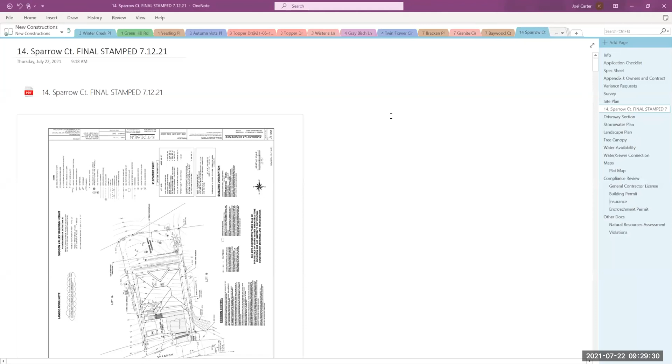I think if you want to submit things with problems, you want to submit a lot earlier in the season. Well, not to make excuses—it seems like that's what I'm doing—but a lot of this was me not expecting this year to be like this, because I'm used to something else from years in the past.

Another thing was I tried submitting a lot of my properties early in the year, and I wasn't able to because of all the change in the office—they made a mistake that wasn't right with my insurance, and they wouldn't let me submit to the ACC for about 2 months until they realized everything was fine. So I would have liked to have all this submitted and taken care of way earlier, and I'm scrambling, and that 2 months really screwed me up, and it was an office mistake.

And then we waited—there were changes in employment, and Joel got on board, so all that kind of snowballed. I agree with you guys, this should have been done right 3 months ago. With everything that's going on, I'm scrambling, making the best out of it.

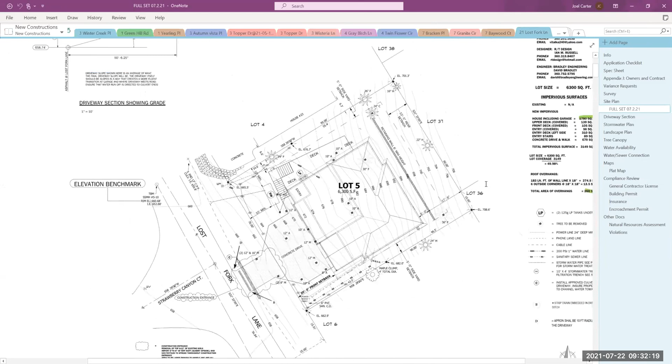If I can get conditional approval, I will make all the necessary changes before I even start building anything. I just want to clear the lot. Didn't we give you two conditional approvals last week? Yep.

Personally, I'm working on both of those properties to fix everything you guys talked about. Hopefully real soon I will submit new plans showing all the changes, everything we talked about on those two. Essentially, I've got no choice but to ask for the same thing here. They're drawn up the way they were a while back. I got all the feedback just recently in the last week or two, and I'm making all the changes. Some of them are quick, some not so much.

The open space isn't that easy to change for the whole house. Like I said, my solution is to cut the eaves on the side and the back. There are homes in Sun Valley like that. I don't love the look of it, but it fixes that problem. And if I can't get the variance, then that's my plan B, which fixes and takes care of that problem.

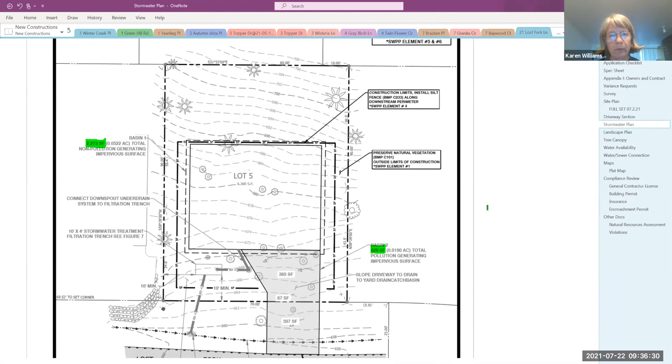It needs to be approved also by ACC, not just by the county, because it bears their engineer's stamp. Well yeah, that's their job, their work. So ACC is the one that stamped it, submitted to county, and then county approved. Yes, and I would like to see that stamp. I can submit all of that to you guys to show that stormwater, everything works just the way it should be, and it's all approved by both the stormwater engineer who designed the system, Ian Russell, and also Belinda at Whatcom County Planning.

I think ACC would like to see that, especially if it's different from this original one, if you haven't updated it. Yeah, easy. Okay, I'm trying to find it now - as soon as I do, I'll email that over to you, Joel.

Let's see, what are other... My problem is that we've got a house with multiple variances again. I mean, I can usually go with one variance if there's an extenuating circumstance, but I don't see the extenuating circumstance here. It's just too large of a house for the lot. And I know we're trying to make it fit, but a variance to me is something that comes when there's an extenuating circumstance, like a wetland or something that needs to be avoided, or the county forcing you to change the plan. So I'm uncomfortable with this one.

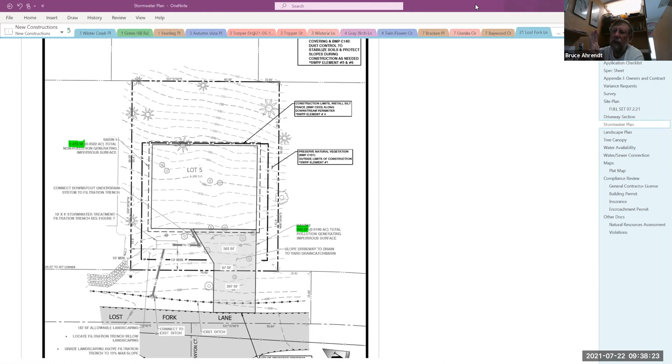You're comfortable with what, Bruce? I'm uncomfortable with this one. We've got multiple variances and stuff. Usually, to me, a variance is something that is done because of an extenuating circumstance, like the county making you move something away from something. This is just because the house is too large for the lot. And going in with an eaveless house, I don't think is a good idea either. I think we'd be much better all the way around if it just got punted and made to fit the lot.

Joel, we have another house from this contractor to review today as well. No, not from Vitali. This is the last one with issues. We had 2 last week.

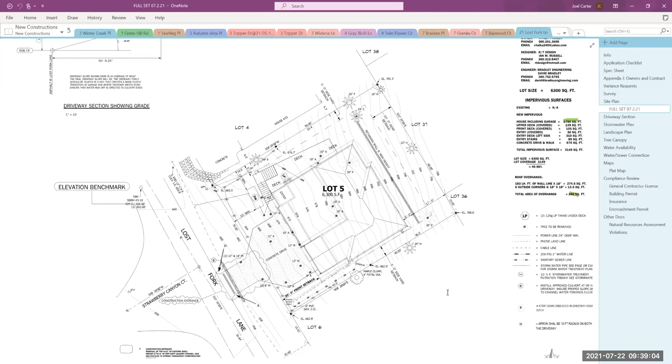And this lot is scary steep. In the back half, I looked at the survey contours and it's 80% slope. On my site visit, I ended up actually getting back there to the back, where along the lot line between the house that's there already, 23 in here. I think that big tree on the lot line is why that area is stable. When that tree dies or has to be cut down, I wonder what'll happen. To me, you need a lot more care on the retaining walls, to not disturb root zones of important trees.

The 24-inch cedar, maybe we can't remove that without harming the 26-inch fir. I just think that this lot is super vulnerable to problems from disturbing it. And so I really don't like doing anything in a rush, not seeing all the problems addressed, and approving it. I'm sorry if this means you can't build it this year. I really, really feel uncomfortable with this whole lot. I have to agree with Bruce and Karen.

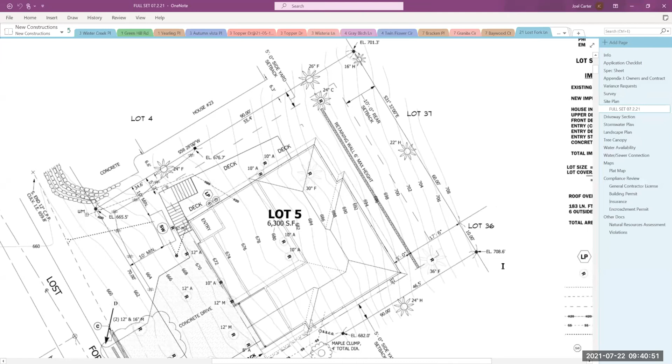All right, anyone want to make a motion? As far as the retaining walls, the trees, the stormwater, the topography, the houses around, I mean, I've gone through over a year of several engineers and county and reports and soils tests, stormwater, geo. Everybody's looked at this and said, here are your permits, you can build. And we're going to have several inspectors out there to make sure that it gets built in a way that doesn't affect anything, there's no danger, and everything is good.

So all of those things, maybe you guys are uncomfortable with, but we've got professionals with a stamp, with reports that all agree that yes, you can build. And although it's a very difficult lot, it's not unusual in our area, especially with the lots being built right now. As far as the variances, yes, my house is a few percentage too big. Again, I can fix that. I just can't fix it in a week.

So I can take care of the variance, or I can lose the eaves, which would allow me to build the house. Having a house with no eaves, although not aesthetically the best, is a thing that is in Sun Valley. There are houses like this in Sun Valley with no eaves, and I'm just saying the sides and the back, which the back nobody's going to see, the sides barely, and that's just my solution.

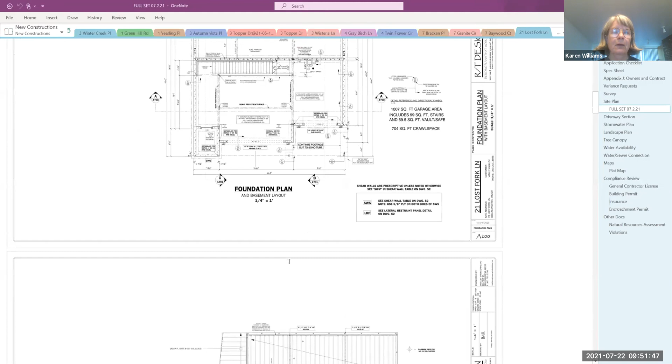And I don't want to lose the eaves. I think the eaves need to stay on there. That's not a big deal compared to your other issues, but...

The house was raised based on a previous ACC comment about reducing the slopes, and as a consequence, now the driveway is too steep. Exactly, I mean we can't just pre-approve something where you fix one thing and it creates another issue. I don't think we can blindly pre-approve things - you fix one thing and then don't see the consequences of it.

So again, I don't think this thing is going to make it this year if it has to be a pre-approval type situation in order to do it. It's not a pre-approval - is there any reason why I can't get approval with conditions, and we know what those are, and it's an easy fix?

I just can't do it in a week because I'm not able to show you guys. But these aren't conditions that are... these are not unknown unknowns where we don't know what we're doing, and if we're changing this, the whole house is going to be impacted.

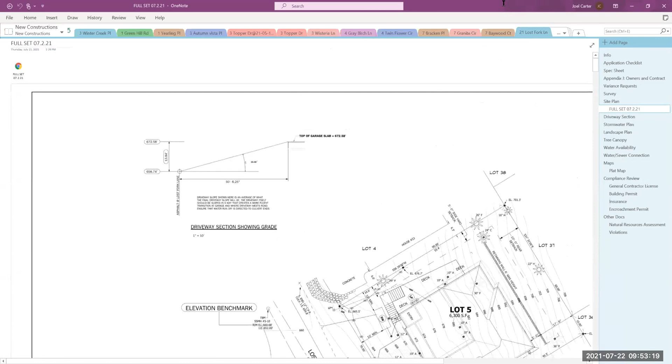No, this is two things, and we overlooked the driveway because we're rushing this, but we can play with the elevation of the house to where it meets both the slope area and the driveway. The retaining wall has already been addressed. He's just looking at this more carefully and putting a lot of this stuff on the plan, which we haven't had to do in previous years. So he's taking care of all of that, and all of it will be taken care of.

And I'm not asking - Vitaly, let me ask you then, so if you're asking for conditional approval so you can go out and get your earthwork started, is what I'm understanding you correctly? And then what happens - trees cut, we allow that, and then your engineers come back and say we can't meet all the requirements. Then what happens? I'm not going to allow that to happen.

We're going to meet all of your guys' requirements because looking at this, we're very, very, very close. I'm not trying to put a 17,000 square foot house on a 2,000 square foot lot.

We're off by just a tiny little bit here, a little bit there. There's a reason why we got inspections and a larger deposit, and there's consequences in building these homes on these slopes. Just like when you're remodeling a house, you run into issues and you address them and fix them.

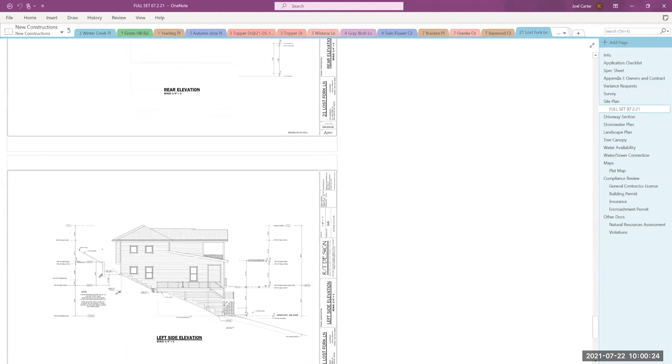And my architect was saying I can do it, I just need a little bit of time, because there's another Sudden Valley builder calling him up every single day with the same exact issue. It just so happens this architect's got a few builders and he's doing the same thing for them. I would love to be able to go do this myself or hire another architect, but I don't have that as an option. I could do it, I just can't do it in a couple of days.

I'd be inclined to go along with the conditional, but does anyone want to make a motion?

Yeah, just one more comment. We gave conditionals on two of his properties last week. I would be most comfortable deferring this to make sure that the conditions on those other two properties are met as he builds them.

Yeah, I'm not at all comfortable passing this until I see all the issues addressed. I think that attempting to address the slopes to make sure you meet the existing grade at the property lines, the fact that that caused the driveway, that caused the whole house to go up 5 feet, says to me that there are no easy fixes on this lot.

Well, I can tell you how the easy fix would be. You lower the house a little bit and then just raise the foundation walls. If we lower the house by 1 foot or whatever it needs to be, get rid of windows and stuff. Well, we have room, even looking at that left side elevation. If we have to get rid of a window, easy, whatever it takes. But I think if we raise the wall on the foundation of the house by 1 foot and lower the house by 1 foot, that's the easy solution.

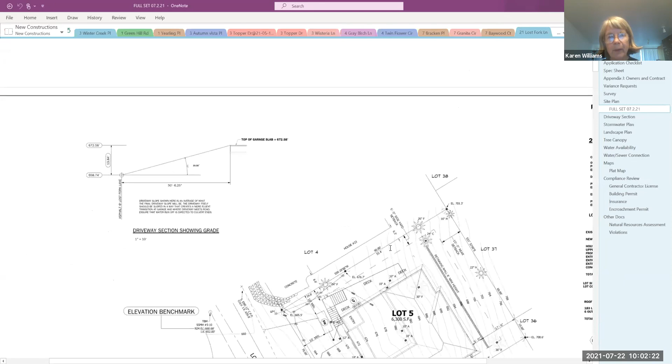I'd really like to see what you're doing with the retaining walls. Are they protecting those trees, or are we going to remove those trees and run the retaining wall onto the neighbor's property, or what are we going to do? No trees, and no retaining wall on the neighbor's property. What I mean is the way that retaining wall ends right at that tree, just a few feet from that other tree, you're going to destroy and damage the roots. First, removing that one tree, the 24-inch cedar, is going to harm the fir next to it. It'll suddenly be exposed where it wasn't.

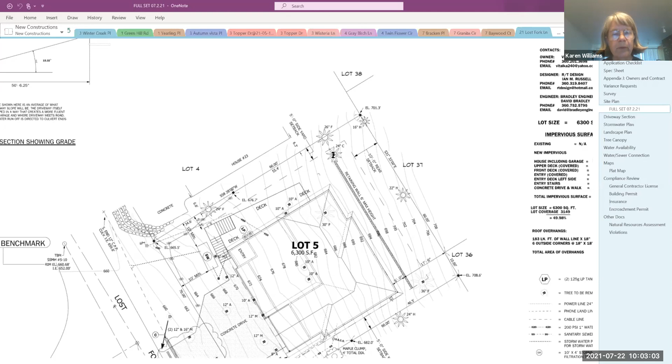We could propose to have the stump left in place there on that cedar. No, it's the canopy, the exposure to the sunlight and the wind and everything like that. And the roots, I have in my backyard where you can actually see the roots of trees that are close to each other intertwined, and one tree leans one way and the other leans the other way. They lean away from each other, and you can see that they depend on each other for stability.

To me, either the retaining wall has to go over onto the neighbor, or it has to go away from those trees, like be held out at the back of the house, maybe. That's exactly how my architect is drawing it up, where it L's down.

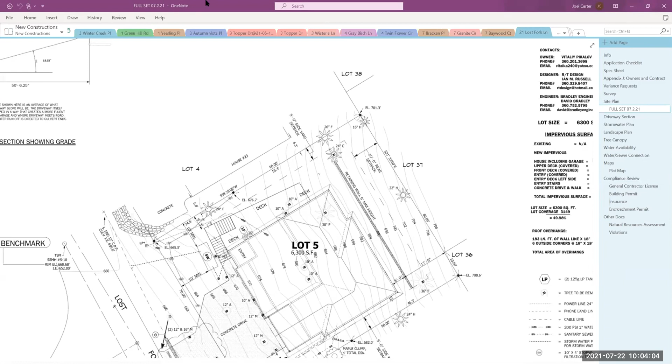I also talked to Ian Russell about this, and instead of going with a poured-in-place retaining wall with a footing, taking your previous notes, we're going to go with a stacked block with geogrid, which I showed a picture of in the previous meeting. It doesn't require any footing, and we don't need to dig a lot behind it like we would with something requiring a footing. So we're taking steps to minimize impact to trees. And as we're cutting the one tree already approved, the 24-inch cedar, we'll do it in a way that the county also inspects, so we don't damage trees and roots and mess up the lot, especially on a slope like this.

Everything that we need to do, we will do in a way that doesn't go in there and mess it up. Yes, very difficult to do at times with these kinds of lots, but not impossible. Most lots out here are difficult because they have slopes and trees. And that's why I'm asking.

Trees in this size range become hazards if they're damaged, and that's been happening around the valley, which is not a good thing. I've noticed that the tree canopy plans with county stamps approved, in many cases, have work done really close to those trees. I don't know what's going on at the county. I don't see that they have a lot of consciousness of tree root zones over there.

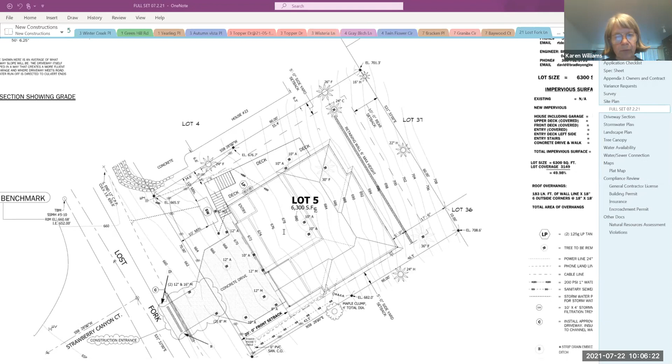Let's correct that. The policies have not changed except for the submittal, electronic submittal. They have essentially not changed. Well, haven't they been updated in June of this year?

Yes, we changed the paint colors, the pre-approved paint colors. Well, let me give you guys an example. This is the frustration that us builders deal with, even on paint colors. I had a customer that I spent a lot of time with, and we bought different paint in a color that you guys denied.

That color is now on your pre-approved list. So here's an example of some of the changes we're making. Literally twice the color was denied, and now that same color is on your pre-approved list. So we're doing our best to keep up with some of these changes, and some of these changes are happening at the worst time, very quickly.

It is extremely difficult to do this, but I'm not saying I won't. I'm just saying work with me. These conditions are not promises. They're written conditions with consequences if I fail to meet them.

I will provide you guys everything, and we can put in the condition that I won't build until I submit you guys a new set of plans. I'm just asking to do everything that I need to do in the watershed window, because otherwise I'm screwed, and that comes at a very high cost to me.

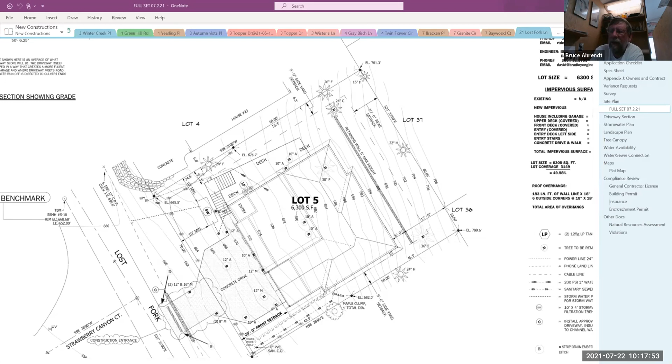That can be one of the conditions: there won't be a hole. I can put in a foundation, backfill, meet the requirement for the watershed window. In the meantime, I'll have everything fixed on the plan. With this house plan, because of my cantilevers, I can make the house smaller without changing the foundation. It's actually a very simple fix. If you just look at the top floor, I cut 2 feet all around, plus a little bit of the deck, and I'm golden. That doesn't change the foundation.

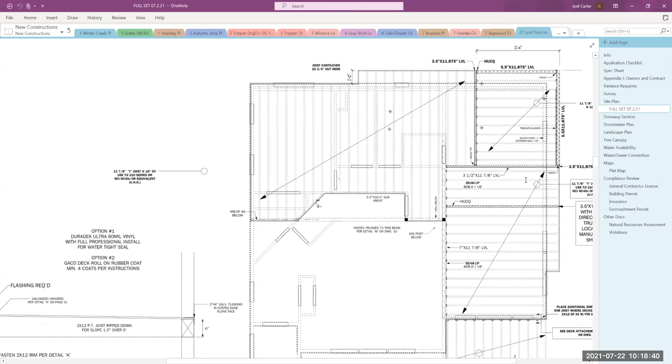Will you be able to meet the open space with that correction too? Yep, that's exactly what I'm saying, I can make the house smaller to meet the open space without changing the foundation. So if I can get a conditional approval, I can do trees, dig out, foundation, backfill by October 1st, but not start building until you guys approve the size of the house. I'll still have eaves, and the house will meet open space. It'll help if I'm making it smaller because I can move the retaining walls around certain trees.

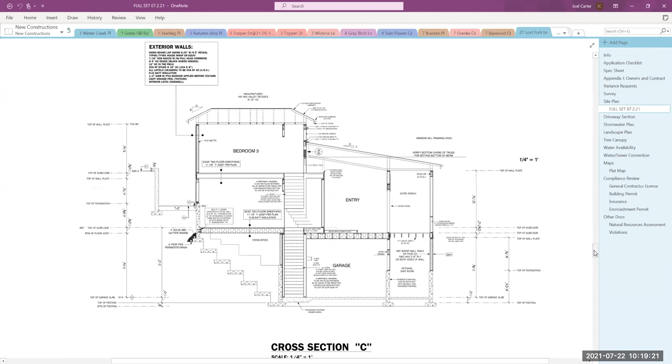For sure meet the driveway requirement, so I can do all of those things. Again, I'm relying heavily on that conditional approval, and it's not just a promise. It's in writing saying you can build this house as long as you do this, this, and this. So I don't have the option of just doing whatever I want without changing the foundation size. The foundation will be fixed, so we won't be seeing anything that's going to require a change in the hole. Nope, nothing.

Okay, I'm leaning toward a conditional approval on this one then. The issue, though, that's difficult to resolve is the driveway slope and the slope stability issues in the back of the lot, to make sure that the ground line is realistic and the retaining walls are realistic and will protect.

So that's actually the easy thing to fix. I can drop the house down because we're only off by a little bit. I can drop the elevation down a foot, foot and a half, whatever's necessary. Three feet is what I calculated. You need to go down three feet, three feet easy. You could only raise it two and still be okay, I can raise my walls on my foundation walls.

Let's make a motion here so we can keep moving. We have three others to go through. Well, I move to deny or defer until there's a good set of plans.

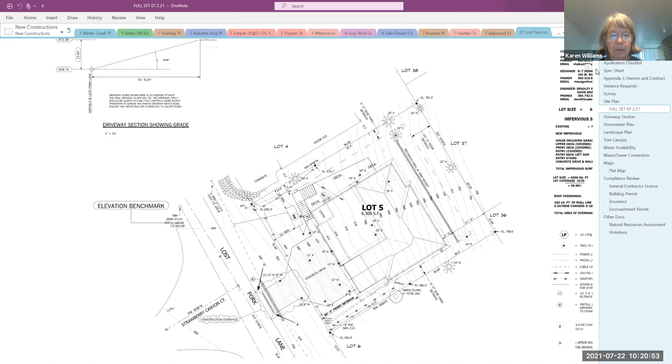Okay, we'll have to take a vote on that. All in favor of denial or deferral? There was no second on that. Thank you.

So that motion's off, so we're gonna make another motion. Can I make a motion? No.

I move to do a conditional approval with all of the stipulations that we had about meeting the coverage, basically clean up all the variances so there's no variances, and to meet the concerns with the retaining walls and stuff that Karen was mentioning. So what we're approving at this point is going forward with the foundation and the clearing, and then everything else, he comes back for final approval on the other things.

And also got a second avoiding a black garage door. And also, what? Avoiding a black garage door. I'm sorry. All right, I'll second. If no one else will second, I'll second that.

All in favor of conditional approval based on the conditions we set forth? Aye. I'll go ahead and vote, as long as he never does this to us again. Any opposed? Okay, we got 3-4, one opposed. It passes.

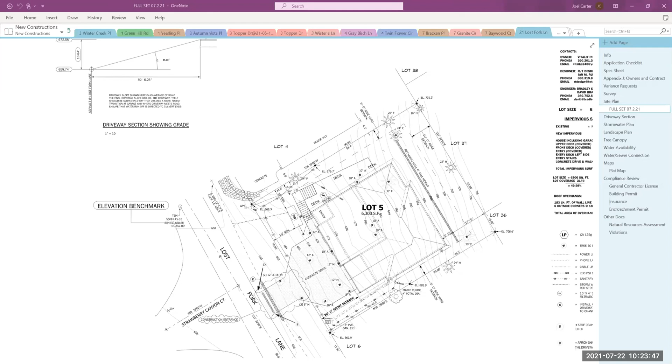What we need you to do is protect those really, really carefully, or offer to the neighbor to extend your retaining wall to protect their house too. Yeah, they have a retaining wall back there too, but they're relying on that tree.

I can talk to the neighbor. I guess I just would need some clarification on how to extend the retaining wall, how you would want to see it, just straight or curve it at an angle towards their house, or whatever's necessary. I can do that, I'm just not sure.

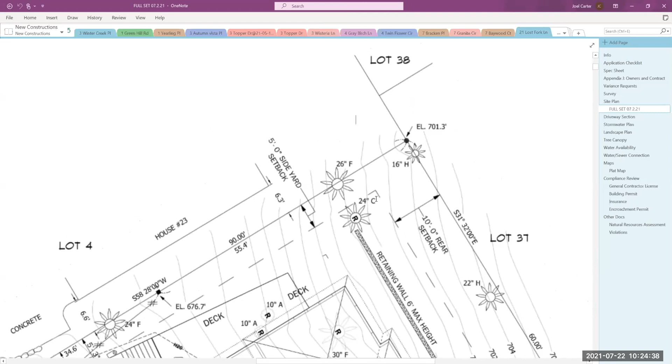Vitaly, we don't want to tell you how to engineer or design your retaining wall. That's something your engineer and your geotech need to come up with a solution for, as well as maintaining the safety of those trees, or possibly, if need be, the removal of a tree, but you'd have to put in a request for such. I will talk to my engineer to do whatever it takes to protect the trees.

Protect the trees, the neighboring homes, and the stability of the slope. That's what you're looking for. We don't want to tell you how to do that, but it needs to be done. We have a new requirement for tree protection barriers placed around the trees at the drip line. You're not to do any earthwork, storage, or driving in that area.

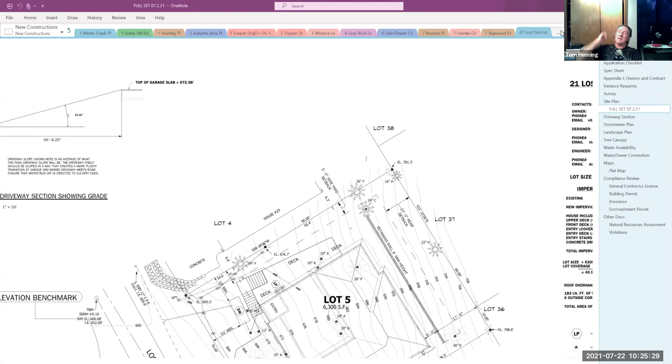Hey, can I bring up something real quick between these, as far as trees go? I don't know what you guys are seeing around your houses, but I've got 28 large trees around my house, and since the weekend of the 28th of June, every one of them is shedding their new growth. It's raining new growth around my house, because the trees are really stressed from the heat and they're trying to save energy and water. As they do this, it creates prime conditions for bark beetle invasion, that's what they wait for, stressed trees. So we have got to do everything we can to protect all of these trees, or we're going to be in big trouble here in Sun Valley.

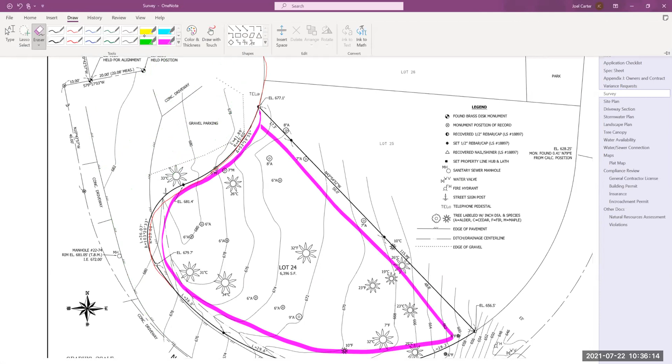Correct. And the actual lot doesn't start—your neighbor's property doesn't start till right here. So the Sun Valley right-of-way property doesn't always match where the actual pavement is going to be. Even though this appears like it could be paved into a cul-de-sac, it's not, and that's very common. Then you can see there's this gravel parking area on the survey, a little bit of a concrete driveway there. I don't think those should be impacted by what's being proposed on the site plan here.

So the concrete driveway, I'm guessing, is my concrete driveway that's on the Sun Valley right of way. I didn't realize that when I bought the house. So I just want some assurance that I will still have sole use of that driveway and the retaining walls, etc., that relate to that. Yeah, there should be no disturbance going on there, and you'll still have access to that.

There's always a little bit of Sun Valley right of way on almost all of these lots, between where the pavement road edge actually is and your actual property line. You're not going to lose access to your property. That's good, that's great to know.

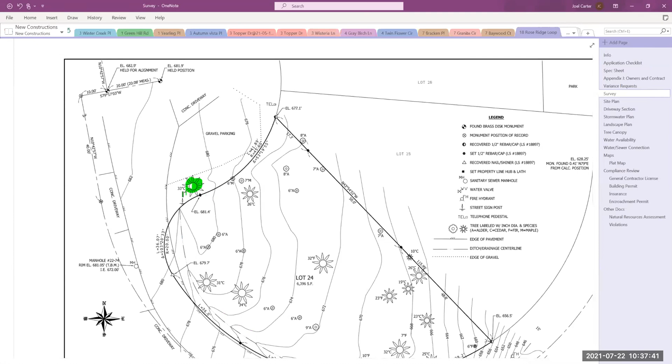They're also requesting the removal of that 33 inch tree, which is the reason. If that's not going to change, why would they need to request approval of that tree? So they would need to request approval of that tree because that tree is on the Sun Valley property. But that makes me think there's going to be changes that might have impacts to our property. That's something, sure, why he wants that tree removed.

I didn't think that. I brought that up as a possibility. It's not being proposed as being removed, it's not actually shown. No decision seemed to have been made about whether it's being kept or removed. I would love for it to stay, but I would also love for, if it turns out that to build the home they're ripping up large roots from that tree, then it would need to be removed because it would become a hazard.

Okay, so is there anything else we need to answer for Jerry at this time, or can we continue on with the proposal on this home?

So I guess I'm not clear about what happens with the variance related to the lot, most of which has regards to the propane tank. And if there's a possibility to get a variance, or I'm not sure if that lot that's currently owned by Sun Valley is a buildable lot, in that there's only 10 feet at the top as shown.

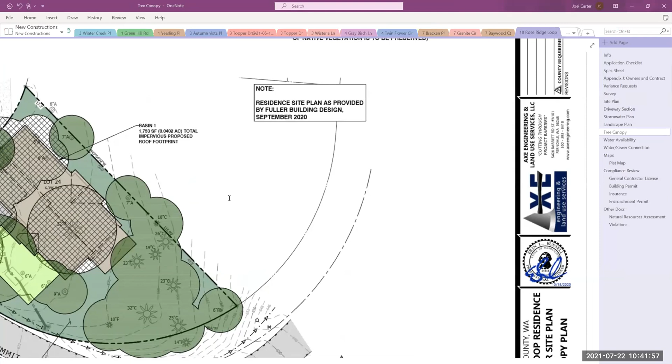All right, so what are we talking about on this one now? Concerned about retaining or removing some trees, but keeping only non-hazard trees, I guess is what that umbrella category is, and reducing the number of potential hazard trees to the minimum. Either really protect a tree or consider removing it.

Okay, I have questions about particular trees. I'm not familiar with what has been ribboned and how it compares to the canopy. I'd just like some details to go back to Sergey with, if there are changes to what's being proposed.

Well, I guess, John, some of that might progress as construction progresses. You may not deem a tree to be a hazard tree right now, but say you go through some trenching and realize you just went through a main root on a tree, thus making it a hazard tree now, would be my estimation.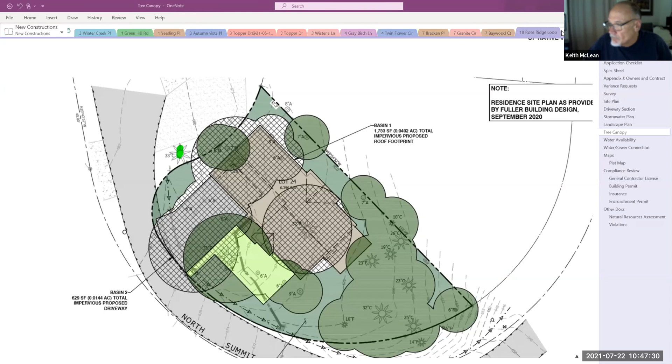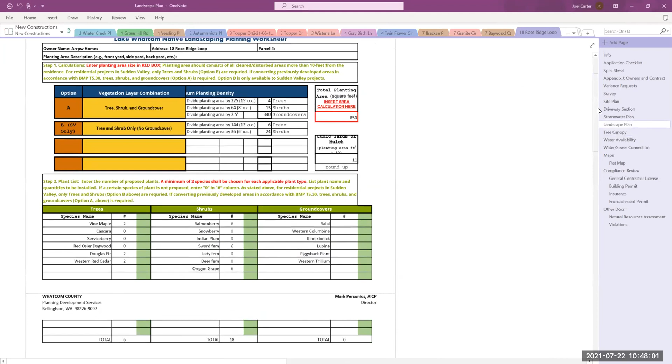Oh, the landscaping plan - proposed plan doesn't match the planting worksheet. So here's our landscape plan worksheet, it's got I think 6 trees, 18 shrubs. And then when we look at it... hang on, did I cut it? Here we go. You know, those numbers don't match - we don't have 6 trees, we don't have 18 shrubs.

But the note under natural vegetation indicates 6 trees and 18 shrubs. The landscape plan is pointing out the landscaping area as shown on the canopy plan, which is the builder's own thing, kind of this area. And for natural vegetation, that will vary depending on how much was disturbed and what the county requires. My rough calculation was 6 trees and 18 shrubs would fit the bill, but that may be adjusted by the county at final time.

Well, the county told me, Kirshner told me, that they don't enforce that. So that's our job. Well, there've been other properties that the county did enforce planting on that had been approved by the ACC without it.

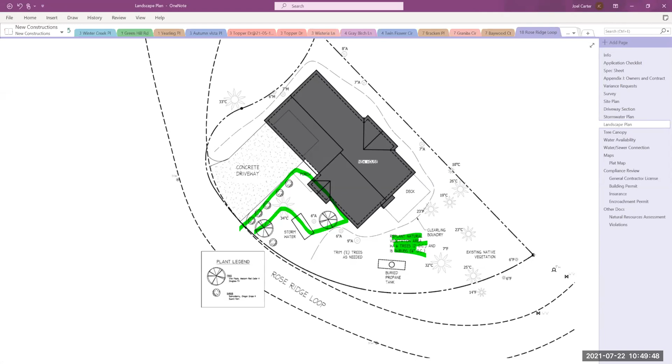Is that what you put in? 850. Maybe that is what you put in, and maybe that is a little unrealistic. I don't know. I don't think generally we would want, in most cases, new trees planted where there already are trees, where you're planning to just leave the native growth alone.

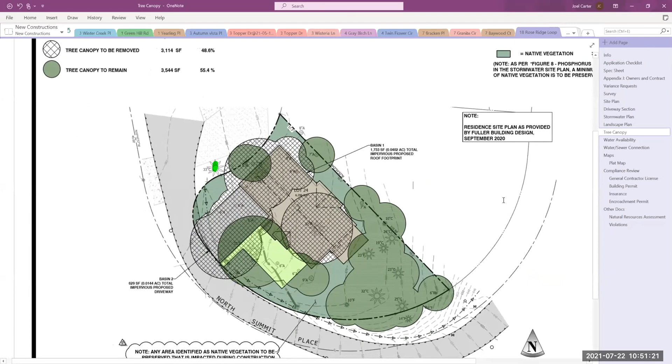Well, so if I've got too many trees, that's fine too. We can reduce them. I guess I'm a little confused by the worksheet that the county is putting out and then it not being that strict.

Yeah, maybe we should take another look at it. That worksheet, it's kind of a stopgap right now. Don't know if it's being unrealistic with the trees, because we don't want you to plant trees 2 feet from your house either. Certainly not Douglas firs.

My sense of it is that you can get pretty accurate about the landscaping area, the light green, what you're going to do there, but the rest of it, the native stuff, kind of evolves and doesn't get finalized until final.

That has been a problem, so we're trying to change that. I've seen some lots where there was like a fern every 20 feet and nothing else for a really large area, and then others where there was no plants at all. So we are trying to address that, but we are struggling with it right now because we hadn't had enough time to think about it.

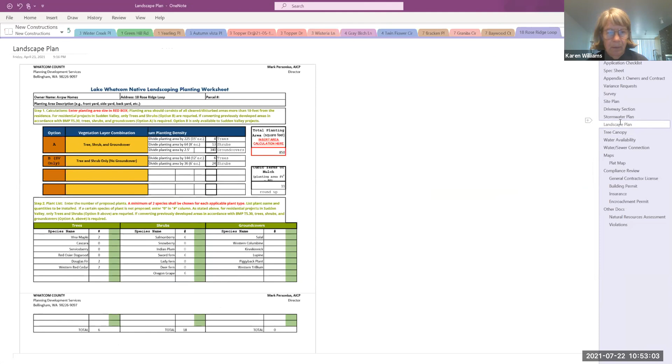So in this case, when this house is excavated, is the plan to remove everything right away? Because with that canopy plan, I see absolutely no room for any kind of storage of overburden, including for future backfill. Looks to me like everything's going to have to be hauled off site.

Well, I can't answer specifically, but this builder in practice shifts dirt from one lot to another. That's why he has several projects going on at the same time. Well, what's he doing to the tree canopies on those lots? Well, no, it's like an existing situation, for instance, right near where I live, 17 Inlet Circle.

It sat all winter. The foundation sat all winter because he needed backfill. And so when he started excavating another lot this summer, he's moving all that dirt over to Inlet Circle and backfilling. So that's his general practice. And that's not necessarily cool. Well, let me think about this.

I think I understand what the deal is. It's a timing matter, I'm guessing, that when he's excavating one lot, he may not have any room to store stuff, so he hauls it all off to the approved pit. And then a couple months later he wants to do some backfill, but he already hauled it all off. So if he then has another lot, he can take dirt from there to do that backfill is kind of what I'm guessing the situation is.

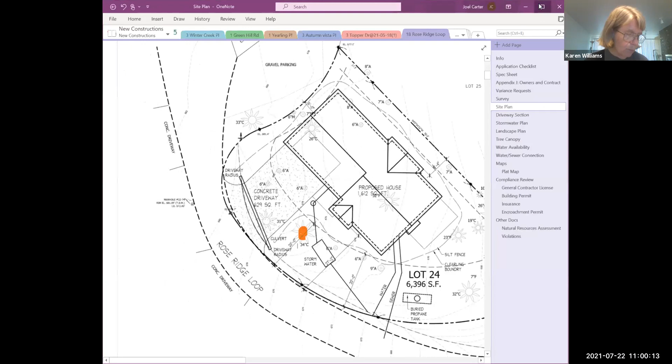Our requirements do show, do require, that they show where all the utilities are going to be brought in. So yes, I think our policies do require that, but anyway, where it is shown is not too bad. Seems to me, especially if you remove those two, that little alder there, it's not going to cause a tree problem.

So getting back to the tree suggestions, I think the whole front yard, those 3 alders and the 1 cedar, if those are removed, then they have room for the propane tank and the stormwater system without destroying the roots of trees. If they leave those in there, I don't know where they can put these 2 buried items. I'm almost certain those alders are all coming out, and I'm pretty sure the cedar would too, because it's just too close to the driveway.

The driveway is not that disruptive generally, unless it's greatly different from the existing grade, which it's not, I don't think, in this case. But the stormwater thing is 4 feet deep, so... that's showing that tree staying.

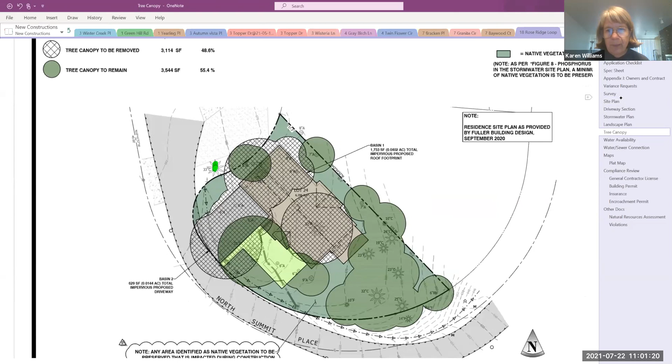These plans should be more consistent in future. That's why I was telling you, I don't know what's been ribboned. There's often trees shown on the canopy plan that are coming out, and the builder will ribbon them. Then usually the county says, okay, well, you can take that out, but you're going to have to replant 3 to 1.

And that's kind of going back to the final landscaping issue - the native vegetation area can get affected by that 3 to 1 replanting rule. If you take the tree out, then you have more room to put your replants in.

So I would request that the buried propane tank be relocated where it won't harm any of the trees to remain. And the...

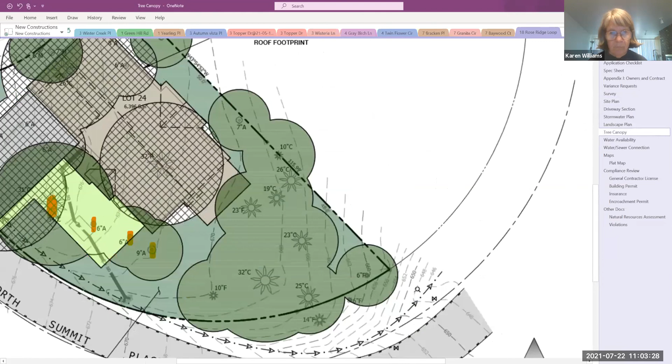Do you see any, is it too close to the 32-inch cedar, for instance? It is, and it's also right over that little tree we were just looking at, the fir - not that big, but on the previous tree canopy plan there's a fir shown right there, I think, a 10-inch fir. I don't know why it's not on this plan. The survey has it there. Oh, 10-inch fir, yeah.

So you'll have a big area there if you get rid of those 4 in the front yard - give you room for the trench. Well, he doesn't want to get too close to the water lines either, though. So I don't know, maybe relocate the stormwater trench a little bit. I don't know, it seems like there should be enough room to do both.

Or use the above ground tanks. Well, yeah, he prefers the buried one. If he used it above ground, he'd have to try and find a place in the rear or the side, and that's awkward with this lot. Yeah, not much room. So ideally, somewhere in the front yard.

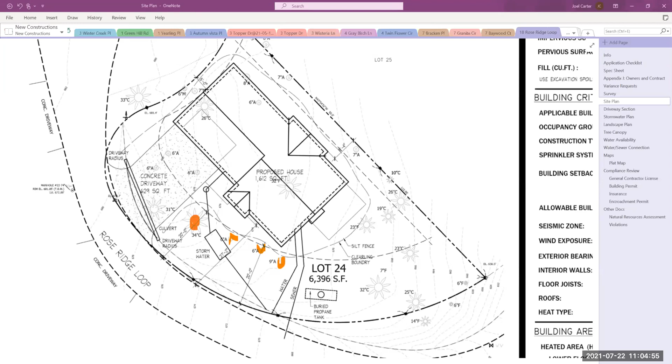If the 33-inch fir cedar on Sudden Valley land there is removed, then maybe you can put it between the driveway and the property line on that side. Is this just a suggestion or no? Yeah, it's just that these kinds of things shouldn't be installed where they're going to harm the trees that are to remain.

Helpful suggestions are just that, they're intended to be suggestions, not orders. Okay, so I have a note that you're concerned about possibly damaging trees by the propane tank, and that you'll consider moving it if tree fencing, tree barriers are necessary, and so you should think about your project in that context. Yeah, I would think if they had the tree barriers set properly, they would know they can't dig in that area. Yeah, and so getting that straightened out before you start work is a lot easier, I would think.

If the trees that Joel marked for removal in the front there, especially that 34-inch cedar -- if we've got a line going through there for the stormwater, if the propane tank would just move more toward the front of the house, you wouldn't have a conflict with the other stuff. It'd still be buried, and it could be rotated too, so it lines up with the contours more. So I think that could easily be just moved over.

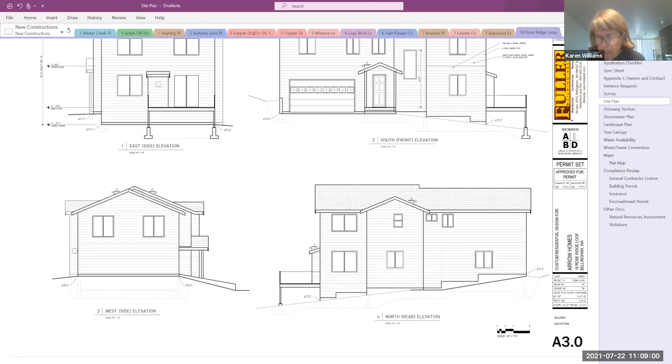I did not have time to check the driveway slope, but just visually from my site visit, I think they probably are okay. They've got it at 11 degrees. Degrees? Yeah, 11... oh, degrees, that's not right, right? What can it be? Yeah, 14 degrees is the maximum.

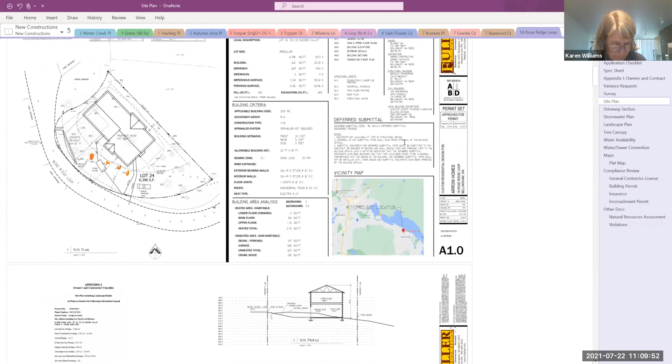Does that lowest point line up with anything where it'll drain? Yeah, probably, right, looking at the contour lines. Let's see. Yeah, there's kind of a scale there, I think. I don't know if we'll keep that, but yeah, okay, that looks reasonable. I didn't do any calculations on it because the lot looked pretty flat, so that's probably okay.

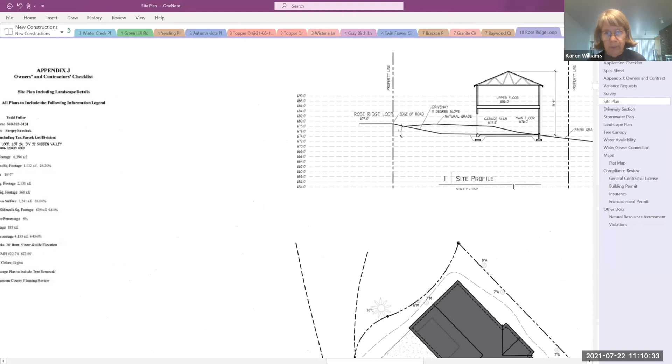But the 0.8, they should fix that. The 0.8, what's that? The ground line is showing as 674.0 elsewhere in the plans. Maybe that should be raised a bit, or the garage slab lowered, one or the other, just anyway. Do you mean the garage slab and the main floor, those differences? No, the 674.8. If you compare that to sheet A3.0, which shows the ground line at the house as 674.0.

This is a minor point. Are we worried about needing retaining walls here? No, it's just a minor point. It's like, okay, you're gonna have to drive over a 10-inch difference between the garage slab and the ground. So they should just tidy that up is all. But the main difference is that they're showing 676 on the left, the west elevation, which doesn't match anything else. So they need to take a look and decide what their elevations are going to be. But I think they should change it with the tree fencing, protection fencing in mind.

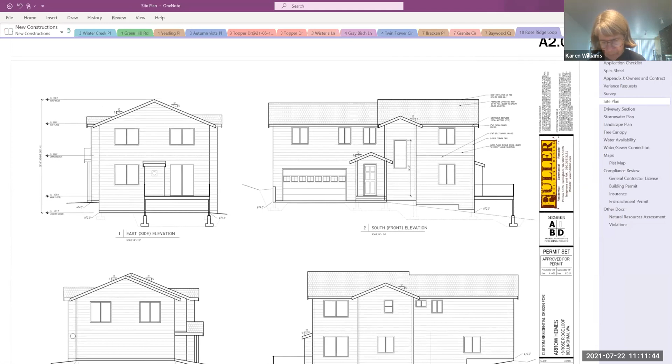All right, Joel, what's next? Let's see, those are the big ones. Roof overhang width - we got 1 foot eaves. This is a question. It's not a requirement on our ACC policies to have those roof overhangs dimensioned, but I do measure them on our physical plans here. And as long as they're within our guidelines for lot coverage, it shouldn't matter anyways.

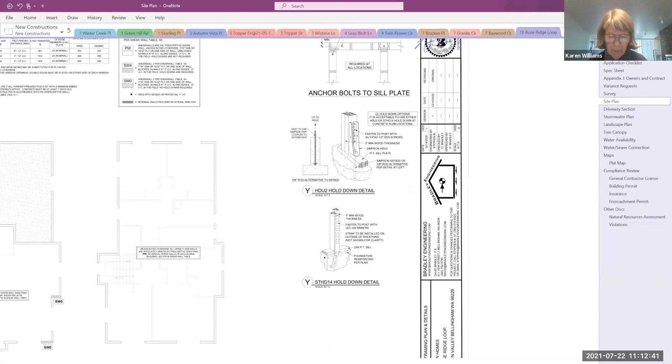Well, within property coverage, 27%, open space 62%. But to do the lot coverage, you have to rely on an assumption about the overhang width, because the floor plans don't show the overhang. And you see the dimensions to the roof overhangs on the site plan, but somehow there's no way to verify the actual size of the house, including the overhangs, unless you know the overhang width.

You can measure them with a ruler. I have a ruler - that's part of my job. But the roof plan gives you everything. In past years, they have had a roof plan that actually dimensioned the roof. Where are we, is this it? Foundation. Wait, go back to the main floor. Framing - here is the roof framing plan. It shows both, yeah, but it doesn't show the overhang width or the dimensions. It's not dimensioned, it doesn't need to be. I can measure it, it's not a requirement.

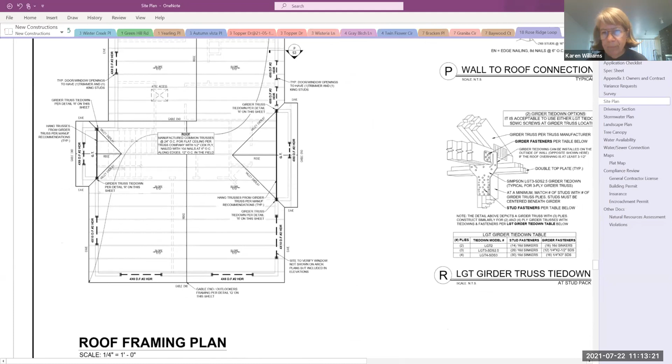It's fine, and we're well within the rules. If that's a concern, if we're getting close to those property coverage rules, then I'll scrutinize it a lot more carefully, but it's not a concern. They don't always draw to scale, especially when they make mid-course changes, and I don't like relying on that. I do like to see them actually dimension it, which they were doing last year. Okay, most of the drawings we've been looking at have had them dimensioned. If it matters, it should be dimensioned. We can't rely on their drawing it to scale, in my opinion.

So I got a question on this - do we have a list of what we still would need to see? I don't see anything on this that would keep us from approving it. We just have some tweaks and stuff on elevations. Everything else looked good, right? Yeah, I have no other issues. And possibly the location of that, but even that's not a killer on where it's at. Would be nice to see it away from those trees.

The location of what? The propane tank, buried. And that could change just if water and sewer changes over a couple feet anyways. The exact location isn't found. So that's something Joel's gonna have to watch. If it looks like they're gonna cut tree roots, it'd be better to move the tank out of the way than to remove extra trees at that point.

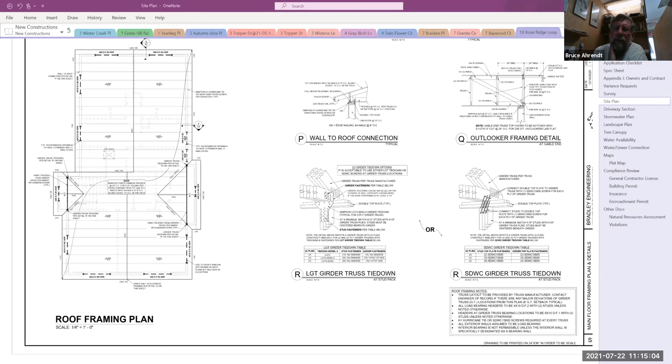I would like to move to approve as submitted, with conditions that those little tweaks are cleaned up and the paperwork updated, and just let Joel handle that. Can we get a second on that? No second. Okay, second by Tom. All in favor? Aye. Opposed?

I'll vote in favor, except I'm not sure I clearly understand the conditions. The conditions were to watch out for the trees and possibly move the propane tank over, and cleaning up the elevation on the plans. Right. Okay. That was an approval by you, Karen? Yeah. Okay, that's unanimous.

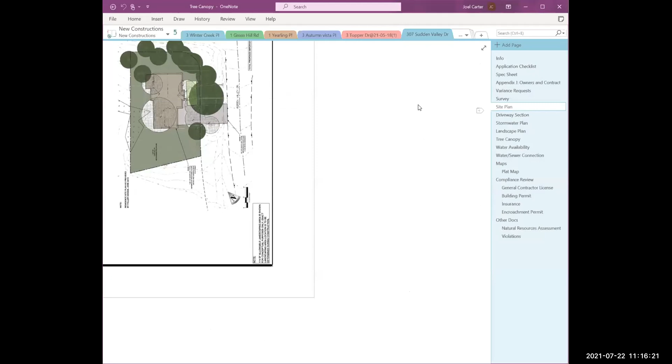Hey John, thank you for your time. Yeah, I'm here for another one too. You are, okay. All right, item number 307. Which one are you here for, John? 307 or 311? 307. All right, let's move to item number 307, Sudden Valley Drive, new construction. Joel still with us? Yeah, yeah. He's napping. Still trying to get over this cold a little bit.

311 Sudden Valley - so we have a black garage door being proposed. We do talk about, and I tell them that the garage door should be the body color unless otherwise approved. So I tell them they are welcome to submit it for approval, but we always recommend that it be the body color. It doesn't necessarily have to be, but we do recommend that. So it does need to be approved if it's going to be black.

So when we're talking black, is this one of these newer ones with just kind of a black, the glass with the black trim? Or are we talking a solid black?

Oh yeah, you're right. Sorry, the spreadsheet hops around a lot here. Okay, so all right, let's ignore the garage door.

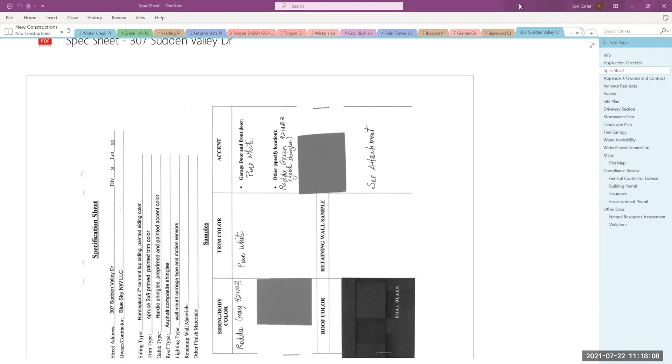There's a 15-foot setback on the front. So do we have a variance in for this? This is because we're in a critical area zone, and so county has approved this. We're right up against the wetlands there. Yeah, this is the one we requested they move back, and then the county said no.

You got to move it back and forward again. That was 16 Baywood - yeah, it's a different one. So county's probably not going to let us move the house back. There's a lot of space between the pavement and the property line on this too, so I'm really not concerned about that if the county doesn't care.

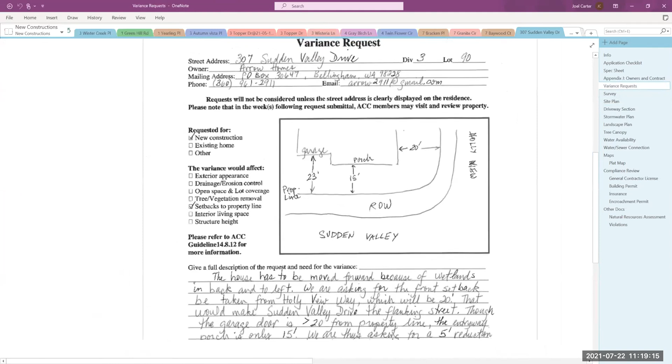I feel the same way. Yeah, the variance request is actually on Sudden Valley Drive. They're calling the front of the house on Holly View, and the flanking street as Sudden Valley Drive. So you still have the 20-foot setback front setback, and the 15-foot is on the flanking street.

Is there a reason why they're trying to say that Sudden Valley Drive is the flanking street? Because the county would object to having less than 20 feet on what is called the front. So the driveway comes off Sudden Valley Drive, which should be giving it a Sudden Valley address, and yet - yeah, it will still have a Sudden Valley address, I'm pretty sure. So on what basis does the county... their zoning code - it's just a formality or labeling or something like that.

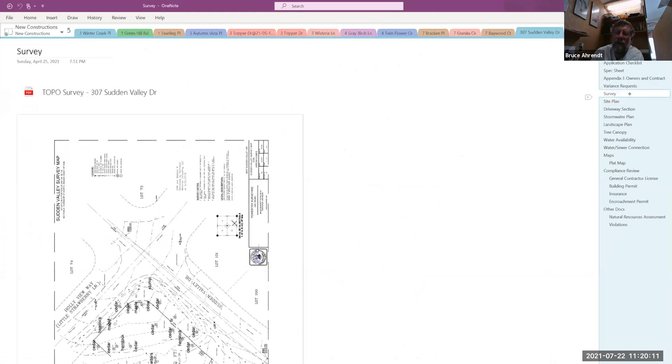If the county wants to accept that, I'm not going to be concerned. But for us it's 20 feet off either side, and we're looking at a variance because of the extenuating circumstance, and there's a lot of space in between that and the pavement. So I'm good with that - it's got an extenuating circumstance, that's why we have variances. All right, let's make a motion to approve the variance right now. I move to approve the variance.

It doesn't cause a sightline problem for the corner? No, it's way back. Okay, I'm good, I'll second. All in favor of approving the variance? Aye. Aye. Okay, that's unanimous - the variance has been approved.

All right, okay, a couple more comments on here. Survey shows a stream to the southwest as well as wetlands to the northwest. Shouldn't there be a buffer line? In the natural resource assessment - are you saying why is there not a buffer line on the site plan? Yeah, it says N-type stream.

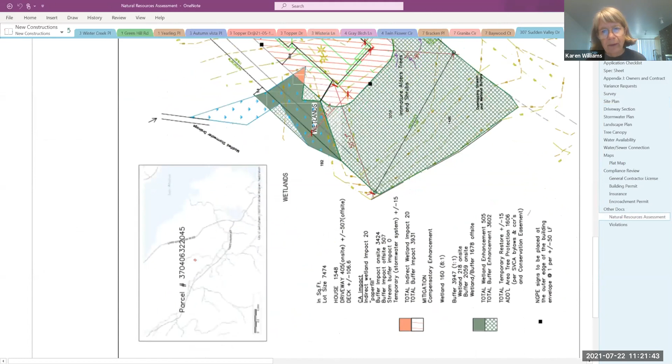I thought those - I don't know if that's the center line of the stream. I think it is, but I'm not sure. Isn't that where the Sudden Valley - I mean it's a stream created by a Sudden Valley culvert, it seems like, or handled by a Sudden Valley culvert down there. Yeah, that's probably just the ditch.

It should have like a - if it's called a stream, it should have a buffer, right? I don't know, well anything here getting wetland, should be shy about that area for tree removals without knowing all these things. I'm a little unsure that leaving that one cedar while removing the other two trees right near it is going to be good for it.

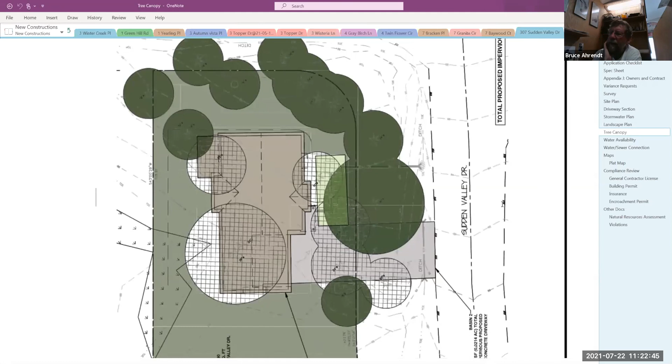Yeah, I was worried about that too - I like trees left or removed in groupings because I'm always worried about wind throw setting up on the remaining trees when they do that, especially next to houses. So that is an immediate concern - question to the south. And if it's wetland stuff, then the county gets involved in that, so it's a little harder.

So yeah, that one cedar that's furthest to the bottom of the page there. But I don't want to recommend removal and then have the county say, oh that's in the buffer, you can't remove that. I mean, you can request for removal, but you can't demand it. You can say, hey, ask county for this, try to seek county permission. But my guess is after the natural resource assessment and wetlands mitigations are all completed, they've accounted for all these trees and trees to remain.

Yeah, the worry is that we have a hazard tree because of a county requirement. It is ultimately, I believe, up to the applicant to make sure that if we have requirements that conflict with county, they have to get that resolved - especially if ours are based on ignorance.

Comment that the site plan should show the entire lot and not be cut off at the corner. It is a little cut off down here.

That's all wetlands, no go zone, right? Mitigation area. So I didn't make a concern of it.

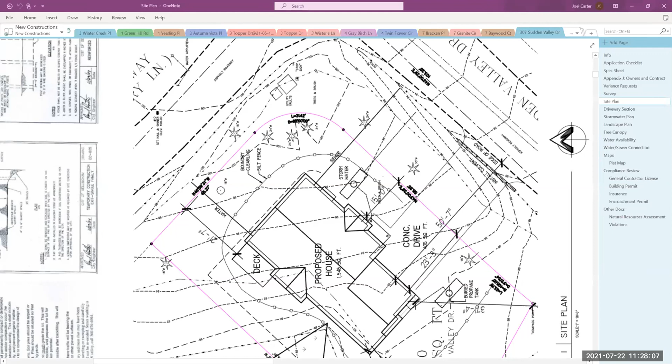Site visits show that existing steep slopes along most of the Sudden Valley Drive lot frontage are currently bare and eroding. This should be addressed and mitigated. The driveway will solve part of the problem, but upslope from that, there's more.

I don't know. I mean, the best we can do is try to plant some plants, I guess, because there's a lot of large trees that were supposed to remain right there. So digging the slope back is not a good idea.

There are no culverts between here and the low point in the road. So that's a good thing, but their culvert will eventually be at risk from dirt eroding down into the ditch.

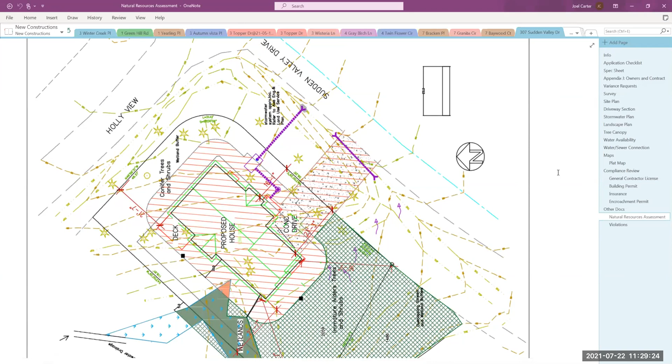So I don't know if we can put... well, that's part of maintenance. That would be part of maintaining their culvert. It's not clear to me what maintaining the culvert and ditch really consists of. I think they're supposed to keep the ditch clear of debris, but not of silt.

That wouldn't be very fair since in many places the silt isn't even coming from the property that it ends up on. So...

I don't know if people are with me on this, we could ask for some evergreen ground cover planting. Or just let it be.

I have noticed, I'm learning about the trees, but I have noticed that a lot of cedars seem to have nothing growing under them. And there's a lot of cedars here.

Maybe nothing can be planted there. Yeah, I've got some rhododendrons growing under a couple, but they don't grow very well. They're not real healthy.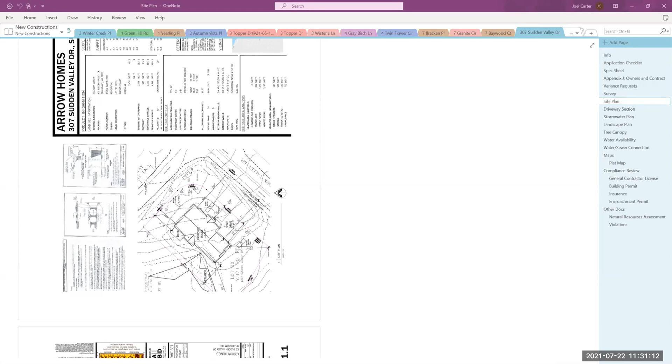So we just need vegetation planted to stabilize, find some way to stabilize without harming those trees. I don't know if a little retaining wall, like a rockery or something, but...

I have no idea. I mean, that would be nice, a small retaining wall. But...

Would that be on their property then, or Sudden Valley's property? It would be in Sudden Valley. I wouldn't want a concrete retaining wall.

I don't know whether we can require that, but I definitely want to insist that they rethink where they're showing their sewer line, propane tank, and water line.

They're all going quite close to different trees that are supposed to remain. Most of the time they're shown for reference only, and in the field they might move them a couple feet if too close to a tree. Their as-built plans would be helpful if they showed where it actually went.

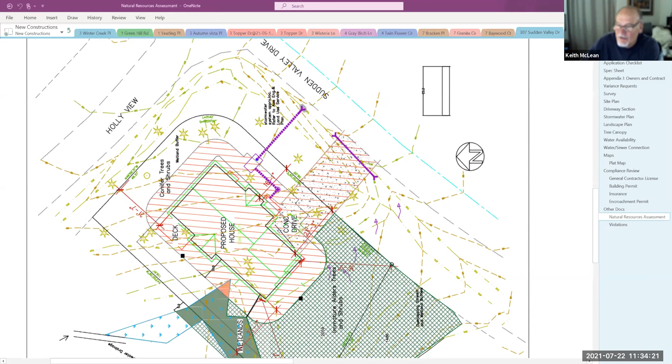Be right back. All right, very good. Thank you, John. I appreciate it, thank you.

All right, on to item number 4, 311 Sudden Valley Drive, new construction.

So we've got John Helmsmith here with Andrea from ABT Consulting. Let's start with that black garage door. We're willing to go body color. Thank you.

Easy, yeah that was easy. Just out of curiosity, what is that garage door, does it have glass panels in it? Just new glass style, just the top row windows. It's on sheet 2 of the plans. Yeah, I'm just trying to get to that.

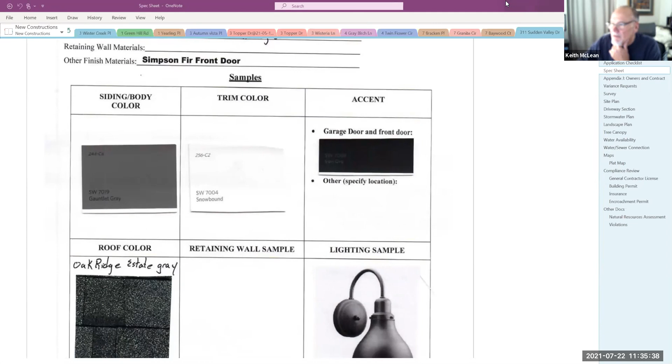All right, let's go on to some of Karen's comments about the driveway. For whatever reason I can't rotate mine. I believe these are being placed in my OneNote here. So it's asking that the driveway shown all the way down to the roadway edge goes to the property line.

Yeah, the survey should show the roadway edge, I don't know if yours does. Yeah it does, okay good. Sudden Valley Drive right there. Well, that's the property line, or is that the edge of pavement? That's the 30-foot setback shown, from the center property line, that's the official center line of Sudden Valley Drive right of way.

So that is not the edge of pavement. I'm pretty sure it is. The contour lines show the ditch starting right there next to it, so it couldn't be the center of the road. No, there wouldn't be a 30-foot dimension if that's shown as a center line, it would be labeled on the survey. They always label what these things are, and I don't think I have your survey in my package, so I don't know, but typically they show edge of pavement. And this is not the edge of pavement, it would not be a uniform distance from your frontage. I agree.

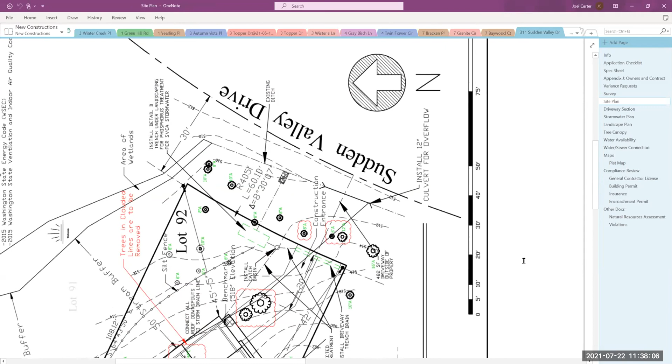And what we want is if it slopes down to the road, follow Appendix A: either have the 3.5-foot downslope at the edge of pavement before you start going up, or if the driveway is too steep, which doesn't look like the case here, you'd need a trench drain emptying into the ditch instead. Yep, well that's what I'm looking for, I want to see the whole driveway profile. Will do, I can add that. No problem.

Joel, you have variances on this one? No, I don't believe we do have any variances. Is that right? That shouldn't be. Yeah, driveway is within. Driveway is not too steep. Lot coverages are good. Property coverage 22%. Open space we have 61.5%.

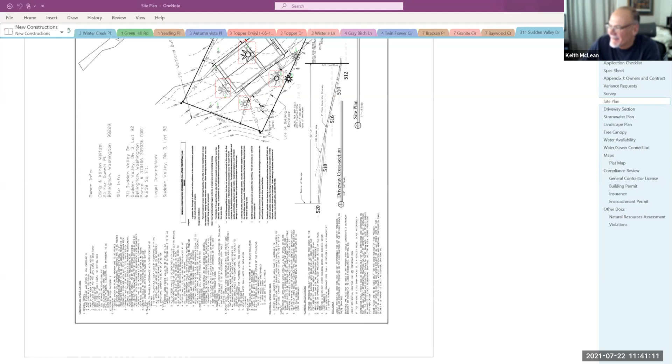And that shows everything's meeting. And we've got the county looking over their shoulder because of wetland stuff, so. Oh yeah, oh yeah, so right, our calls on this are kind of preempted by the county on vegetation and that sort of stuff, so. Jump to the main things, and other than that, I'd like to close this one out. Yep.

Yeah, so your garage floor on the, where is it? So front elevation, right there where you are now, can you see my screen? On the driveway cross section, it shows the top at 520. Yeah, we've got 518 here. Yeah, so the driveway cross section was something that wasn't originally submitted, it was requested. I think they brought it in, and I didn't catch that then. So that's 520, and then.

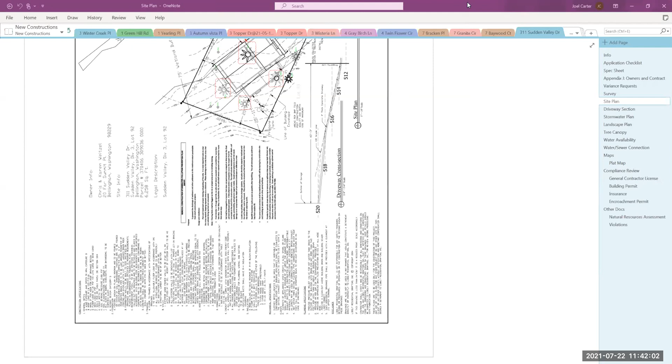On sheet 2, or 518. You've got this listed as 520. Right, on sheet 2 with the home elevations. Well, the ground line is shown at 518. Oh no, the garage slab is also shown at 518. So I think I'm not sure either one would work, but well, at 520 their driveway is 13%. So if you go down to 518, then even better. Right, so it would be good to clean that up and pick one. Yeah, sure, not a problem.

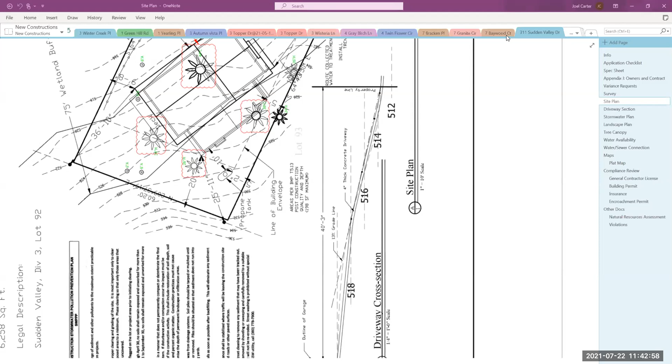Next up, lot outline on the 7th draft site plan seems to be accidentally shifted, making it difficult to verify dimension and setbacks. But excuse me, the arrows are to the right points, so it's just kind of a plan cleanup thing, not a big issue. It'd be nice if they shifted that back so it matches the corners. Sure, yep.

And stormwater treatment should be located under the driveway for multiple reasons. It should not be in the wetland buffer. It should not be so close to multiple trees designated to remain. It should be in a higher location to successfully outlet to the ditch.

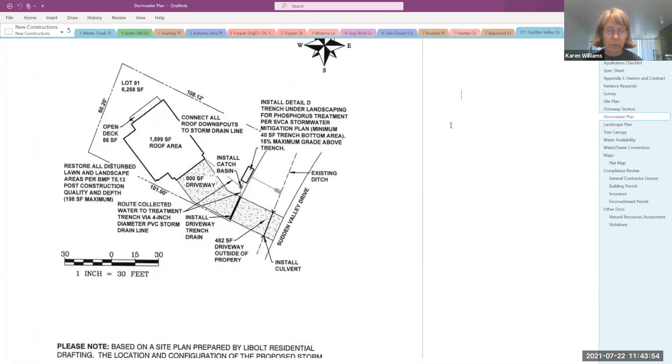So you want to make him move the stormwater under the driveway? Yeah, that makes sense to me. There is a detail for that. There is an option. Right.

What's wrong with the location? Yeah, I'm not following that. It's inside the stream buffer, right? Right, well, it's approved by the county. It'd be inside the stream buffer if it was in the driveway, wouldn't it? Or yeah, no, pretty much. Be in the, no, critical stream area? Buffer follows that side of the house, right? No, with this 50-foot stream buffer. Yeah, it would be outside the stream buffer if it was under the driveway.

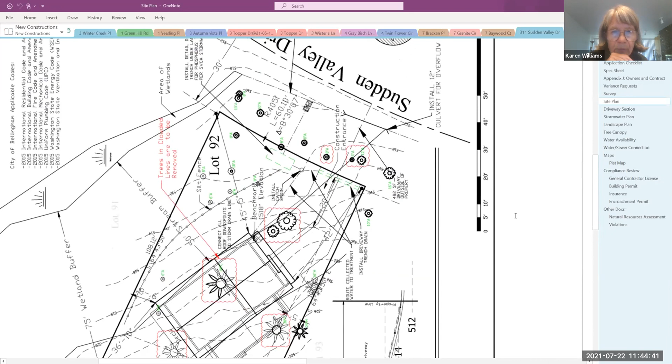It's also close to those trees there in the stream buffer, so they won't want you to cut them down even though they're alders, I'm guessing. They seem mostly to be alders. Yeah, they are. But if they're not going to allow you to cut those trees down, and we require you to put tree protection fencing around them, it could be an issue with the one, particularly with the one right in front of it at the lot line.

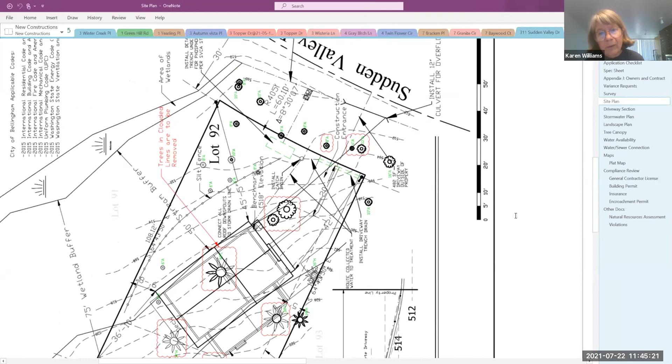Well, it's a 4-foot deep pit is all it is. Right. Yeah, but it's shown like 2 feet from one of those trees. So that little alder, right, that's on the lot line. Right, right, so if in the stream buffer you're not allowed to cut down trees, then you'll have a problem. We will require you to fence off the root zones and not dig there. Yeah, I don't think it's an issue, we can move that up the lot. There's another one uphill from it, an 8-inch alder. And that is marked as remaining, what am I looking at here?

Right, but it's quite a distance from that. I think if we just move it towards that tree, Chris, to avoid the tree roots on those things, the county is gonna be looking so close on this. It's really difficult for me to be concerned about a small alder considering their short lifespan anyway. They're wanting to tip over as is.

But the other thing is, is the county gonna have them plant at the bottom? So if it's 4 feet deep below that contour line, which is approximately 511.5 or something, it's below 512. So if you take 4 feet off of that, you're at 508 or less, and the ditch is 510. So you're asking water to flow uphill if you put it there.

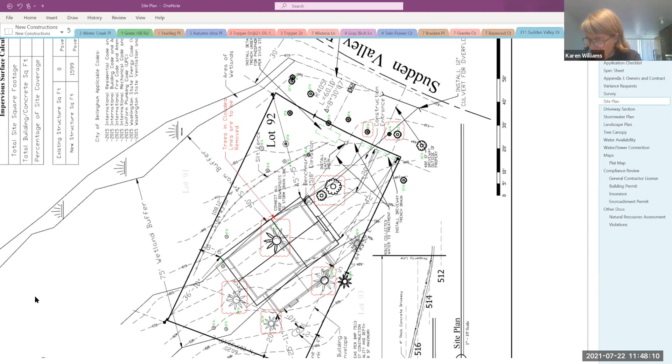That's it. Okay, can we get a motion? Overall, I like this one. Move to approve? Second. All in favor? Thanks, okay, it's unanimous. Great.

Thank you very much. Great, thank you. That is approval without the black garage door, right? Right, he agreed. Okay, so I'll have the site plan changed to reflect those comments. Great, thank you. Good, thank you very much for your time. I appreciate it. Yeah, thank you.

All right guys, that was a long one. Sorry, yeah, who seconded? Oh well, who seconded? I was gonna ask. I did, yeah, Bruce did. Bruce, okay, yeah Bruce seconded. All right, good job, appreciate it.

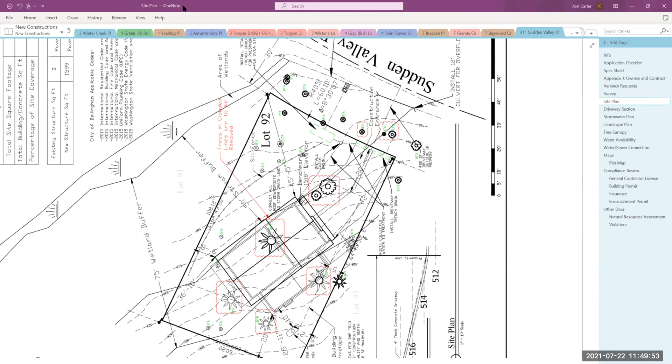New business. I guess I'll have to get with Deanna and figure out our next meeting schedule for next Thursday. Joel, did we have any new constructions for next Thursday? I do have some, yes. I think after the end of July it'll really slow down because everyone's trying to get in before our July 31st cutoff date for new submittals. So I think in the next 2 weeks here, we'll be pretty much done with the new construction submittals.

I did have, so, July 29th at 9 a.m., is that what you're thinking? Say that again. July 29th at 9 a.m., is that what you're thinking for the next one? Yeah, that'd be great. That is not a regular scheduled meeting, you know, you're putting in an extra one.

And I will not be there. Oh, you won't? Nope, I will be driving to Colorado on that day. Oh, I'll go with you. Very nice. You can Zoom and drive at the same time. I don't think so.

All right, well, I should have things posted for you by Friday, Bruce, if you want to take a look ahead of time and leave any comments. Oh, I did have one more I was going to ask, if you wanted to take a look at it today. It was a previous deferral. I know you're getting late on time here, it's been a long meeting.

It was for 14 Sparrow. They came back last week, Wednesday, with a lot of updates, but totally your call. Can you send it out and give everyone time to look at it, and then we could do it next Thursday? Yeah, I'll put it on the agenda for next week. Yeah, that would be helpful.